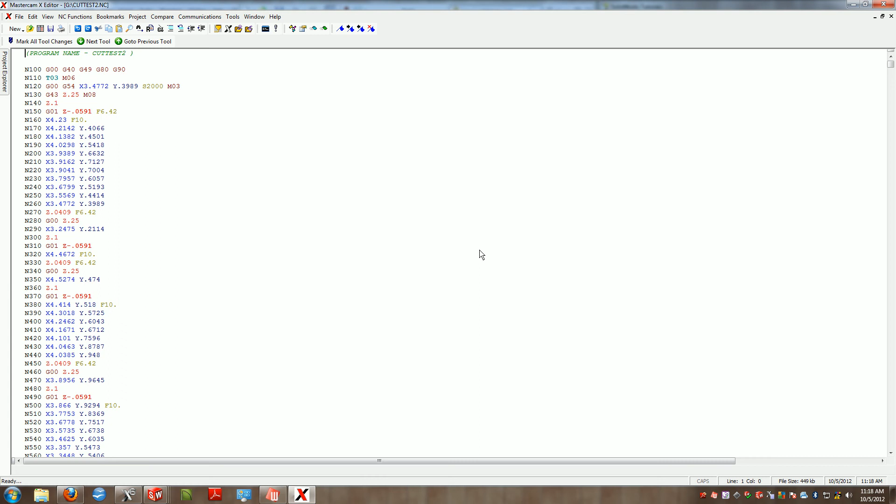Alright folks, today we're going to take a look at the Solidworks Revolve feature, and we have a tutorial available for us to follow along that is directly built into Solidworks. You can also watch this YouTube to keep up with that. If you take a look at the tutorials, which is right here on our resource tab, we can follow along with the Solidworks tutorials

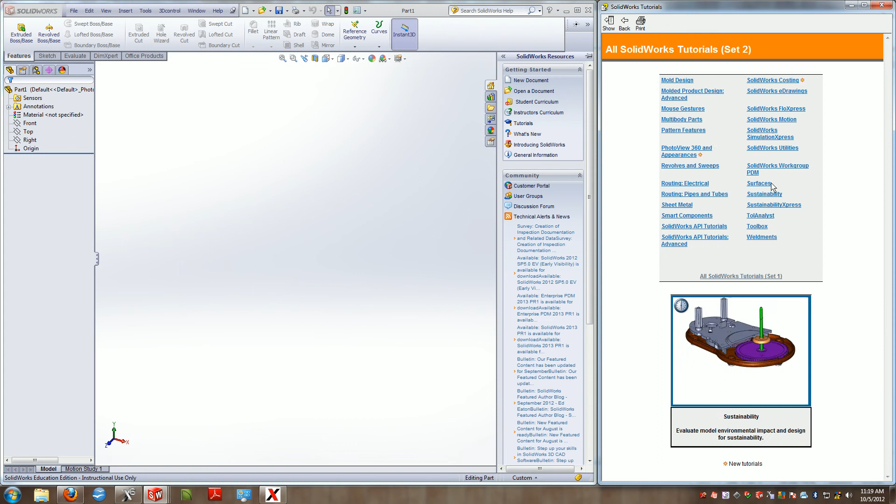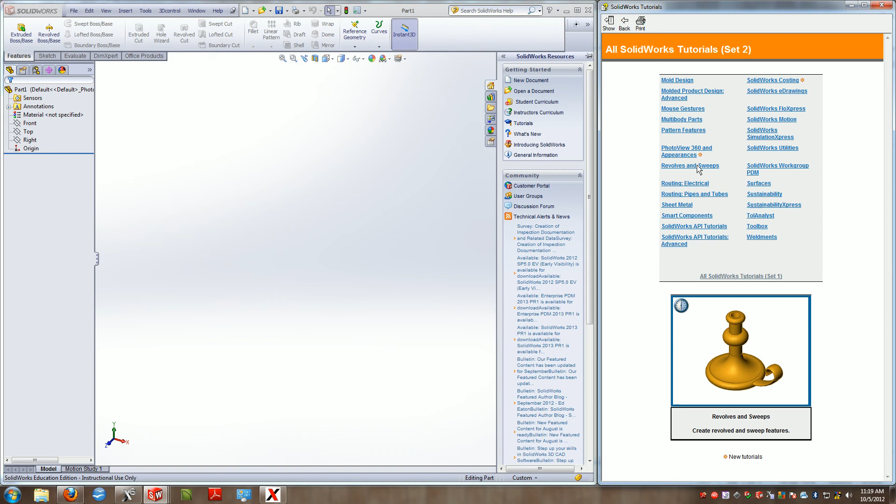set 2, and if you take a look, we have Revolves and Sweeps, which is right here. So we can click on the Revolves and Sweeps, and basically what we're going to be making is this candlestick holder, which is the Revolve feature that we have not yet touched, and then also the Sweep feature to go ahead and create the handle. So I'll hit Revolves and Sweeps, and we can follow along with this tutorial to get this part created.

So I'll hit next. And the first thing you have to know about Revolves, in particular, is that we're drawing half of what we want our final product to be. So if you take a look at this, our bottom section is 90 millimeters. That means that the overall width of this is going to be 180 millimeters when we're done. The height remains the same, but whatever line we're revolving about will be doubled, and you'll see that as I work through the lesson.

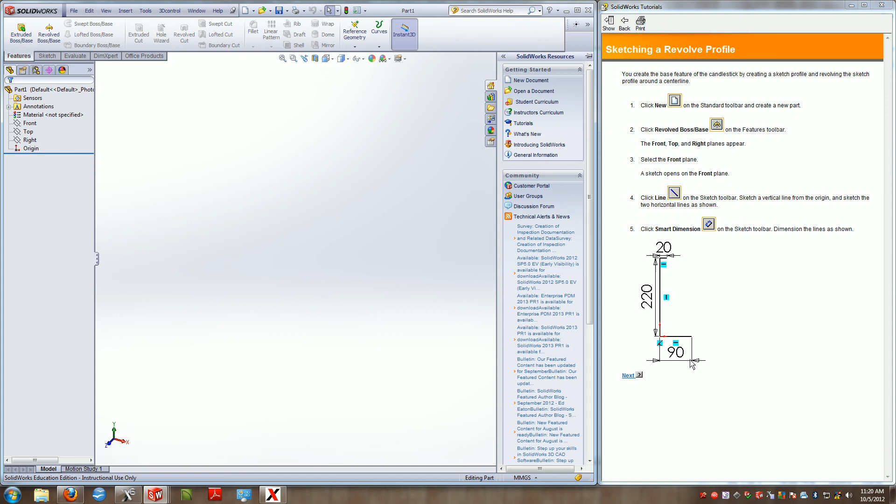Because we are in metric, I'm going to go ahead and change my units to metric. So I'll hit Options, Document Properties, Units, and we'll go to millimeters. Okay. And once again, you can see we're working off our origin. So I'm going to start on the front plane. I'm going to spacebar normal to that front plane, and I'm going to sketch a line that is directly vertical off my origin. That's where I'm going to start.

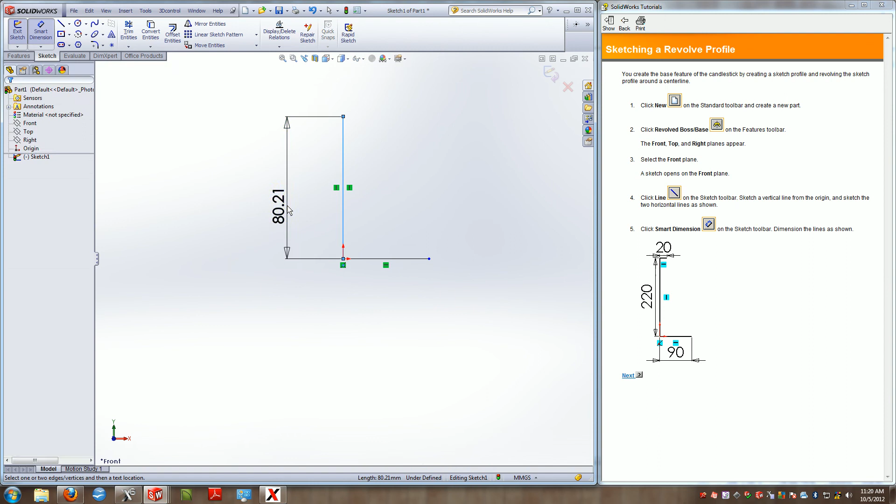If you want, you can also place the horizontal line, and we can smart dimension those to 220 by 90 millimeters. All right, and then if you zoom out, you'll also notice they have a little sketch line coming off at 20 millimeters. So I'll get that drawn and smart dimension that to 20 millimeters. You should note that we have a fully defined sketch and that everything is black, which is a good sign. All right, so we have a fully defined sketch that is black.

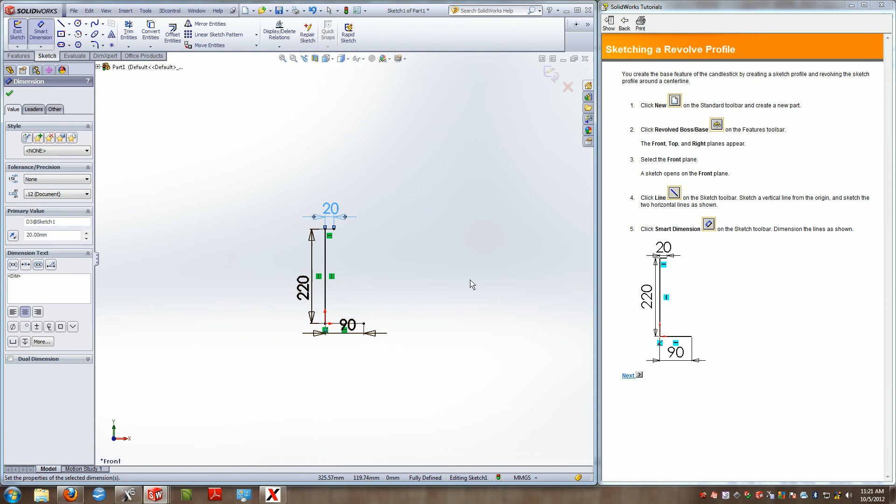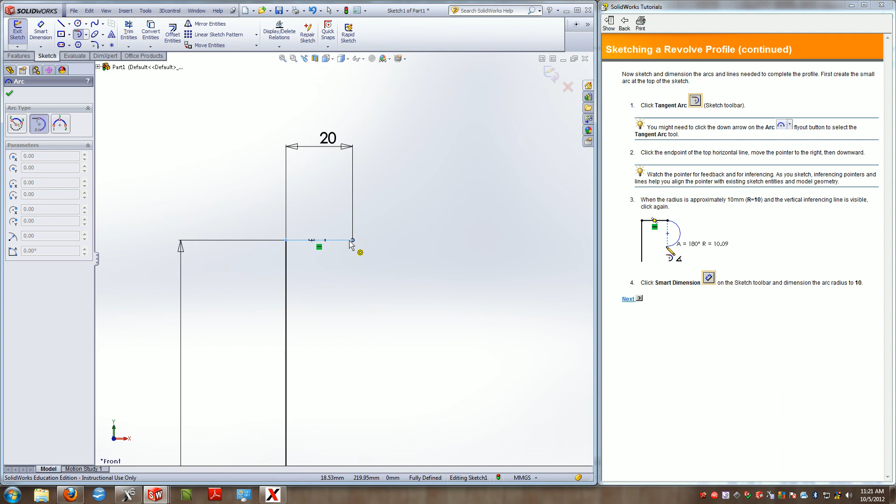So we can go ahead and go to our next step, where we are creating a simple arc. That arc has a center point that is perpendicular to this line. All right, so the center point falls on a perpendicular line. So I'm going to zoom into that section, and I'll create a tangent arc. I will select this portion and this portion. So all I do is select my point, come down, and now we can define the dimensions on that.

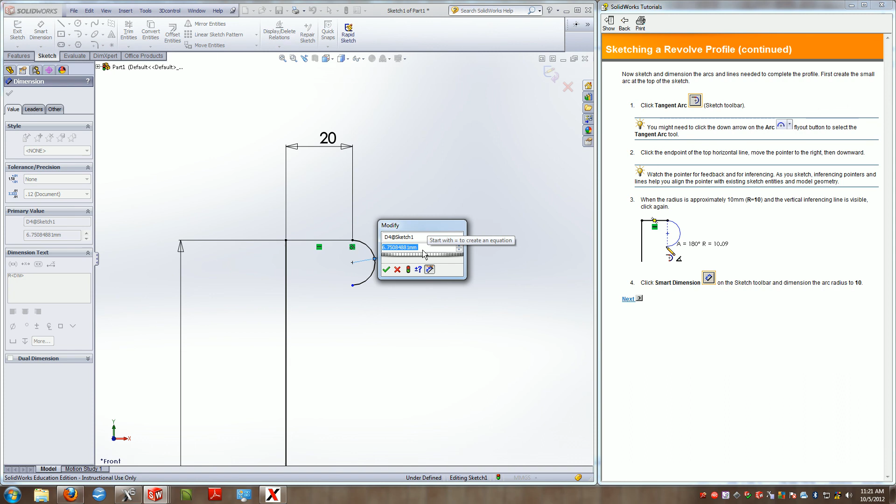So I'll go ahead and smart dimension this arc. All right, it has a radius of 10.09. All right, which gives us that arc. I will hit next. All right. We're going to create a couple more vertical lines coming off this and another arc. You'll learn a new feature in this where we're setting relations to create two lines that are equal, and I'll show you that in a second.

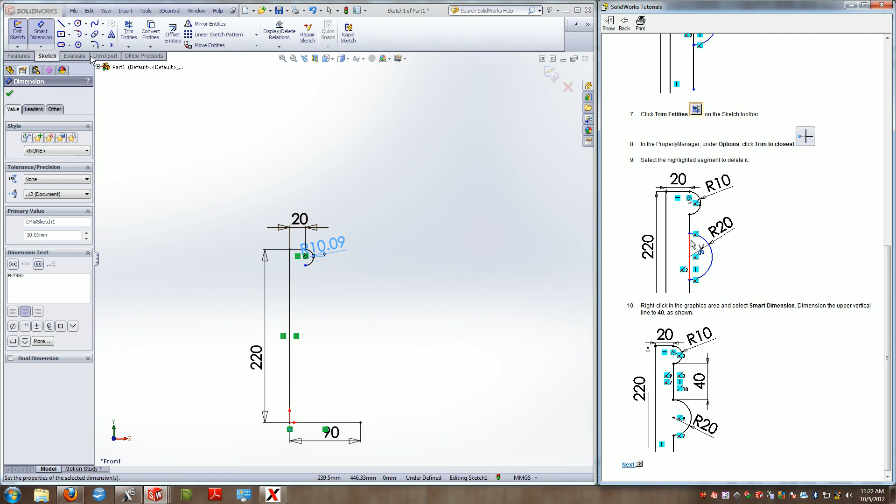So the first thing I'm going to do is create a line that is coming off here. I'll take a little space and I'll create another line, like so. Then I can get an arc placed in between these two. The one thing that we do have to do is set these two equal to each other. So I'm going to select this line. I'm going to hold Shift on my keyboard, select this line. I'm going to set them equal to each other.

Setting them equal to each other, you take a look at this new relation that has been added. It tells me that if I define the dimension on this line to 40 millimeters, it will automatically set this line to 40 millimeters, which is a nice feature. So using these relations can save us some dimensioning down the road. It can also save us some parameters if we know these lines need to be equal to each other.

So I'm going to go ahead and select another arc to get placed in here. Like so. And I can get that dimension to a radius of 20. That should space these lines out appropriately. Okay. In this particular tutorial, they have you draw a solid line, draw the arc, and then trim out the line. Whichever option you decide to go with will work.

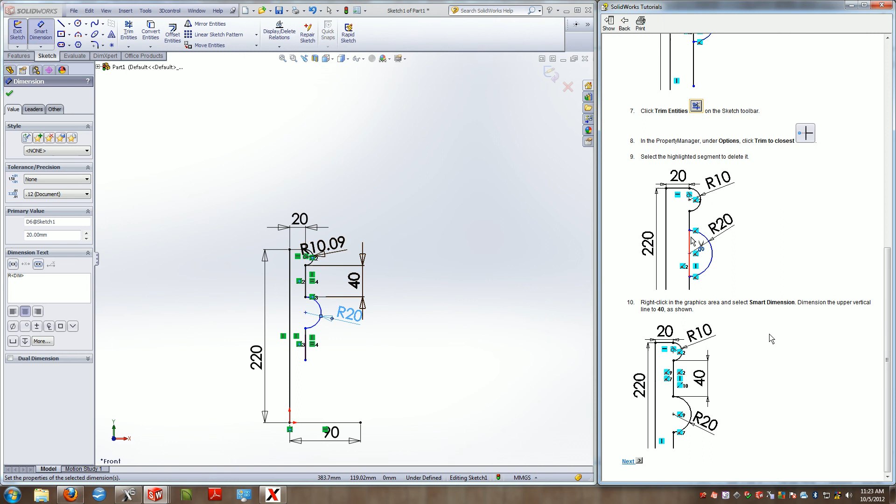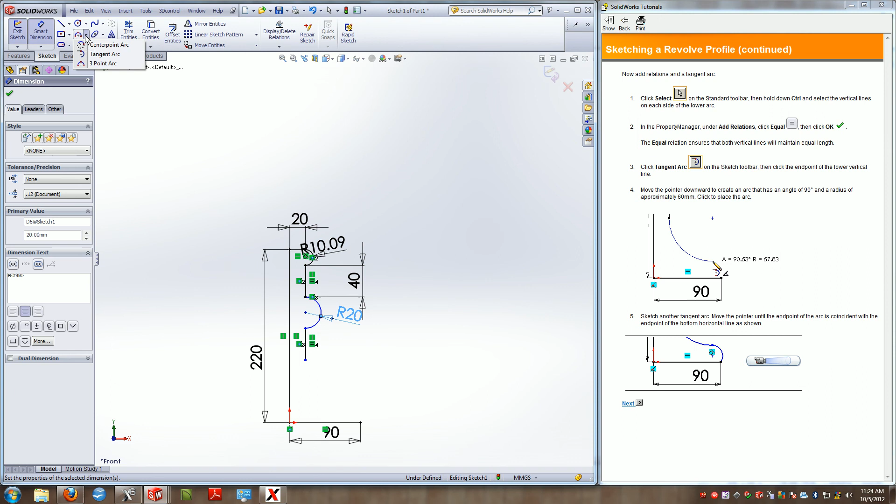So this is the guy in the front, right? All right. What they're having us do here is our relations, which we've already done. So we're going to go ahead and create a tangent arc to swing down for this. So I'll go to create arc, tangent arc, and I'm going to swing this arc out like so, and then I'll place this point down here. Just like so. We can go ahead and get these dimensions now.

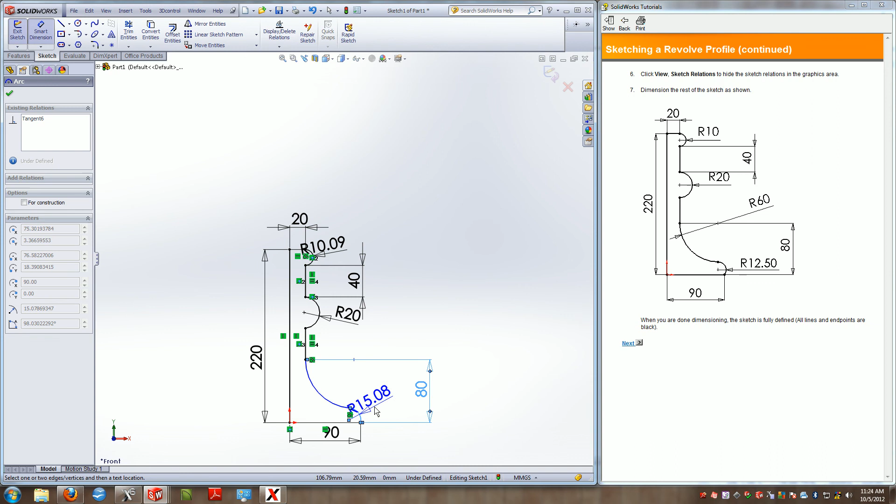This has an overall height of 80 millimeters, so I'll select this point, and pull out my dimension to note that at 80, like so. And this has a dimension of 12.5. Good. And this has a radius of 60. Good. You notice that I have a fully defined sketch now, completely black.

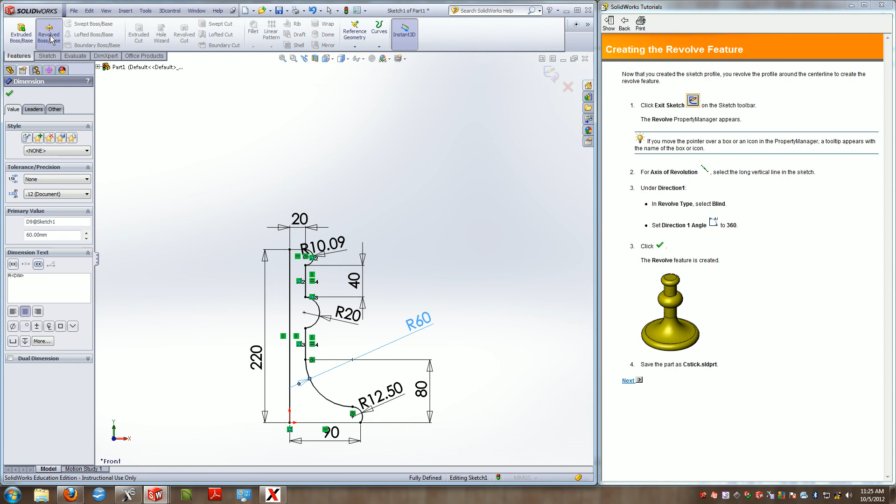The cool thing about revolving is what it does is takes this simple profile that we've just done and spins it about a center axis. So this is my profile that I'm going to spin about this center axis. So I'll come over to Features and select my Revolve Boss/Base. I will click on it, and it automatically looks at this section. You can see it zoom into it.

And in our Property Manager for our Revolve feature, I always like to say work from the top down, so work from this section all the way down to here. First thing it's asking for is the axis of revolution. The axis of revolution is also the center point in which we're going to revolve about. So I'm going to click in this box and tell the computer that this is my axis.

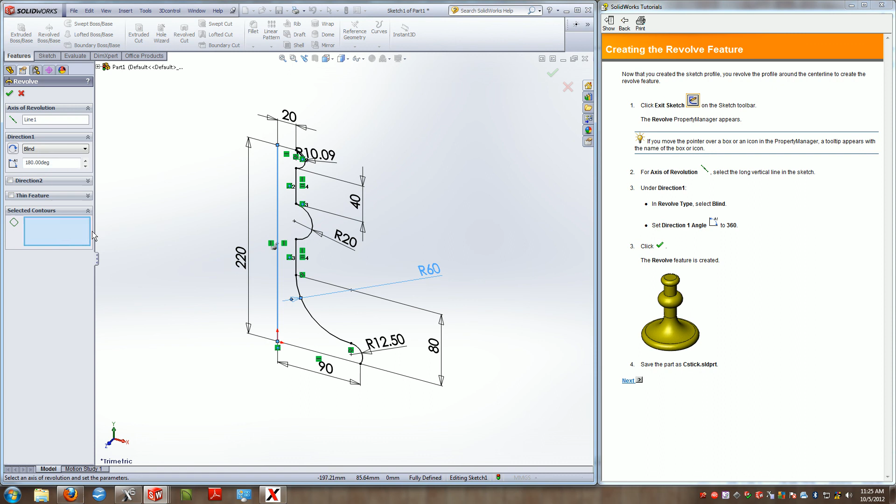All right. We're revolving blindly, and this asks how many degrees we want to revolve. So if we only want to revolve, let's say, half of this, I can tell it 180 degrees. My selected contours are the contours or the area that I want to revolve. So I will select this, and you can see it automatically starts to revolve that into a solid feature for the amount of degrees that I've selected. So if I change my degrees, you can see this revolve feature change as well.

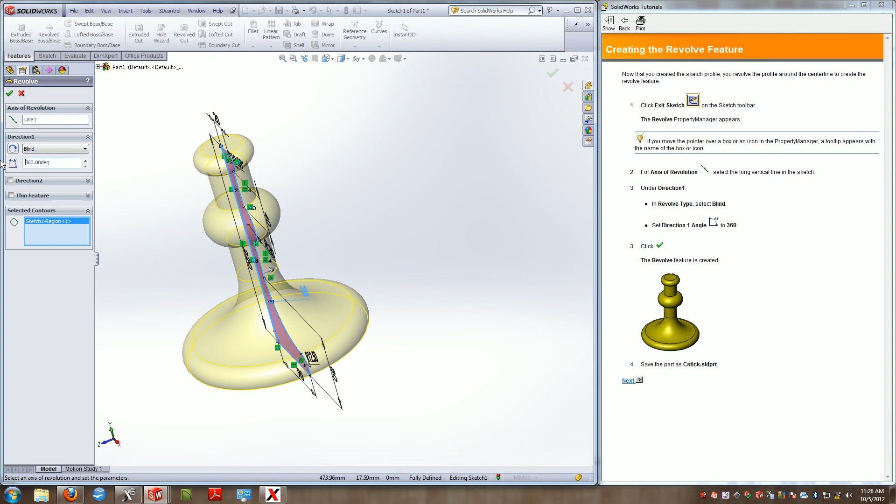If I want this to be completely solid around, I could say 360 degrees. It will automatically finish this up, and what you're left with is now a solid that is spun about or created from that simple sketch that we just did. This can save you a lot of time. If you take a look at this, this is one feature driven off of one sketch.

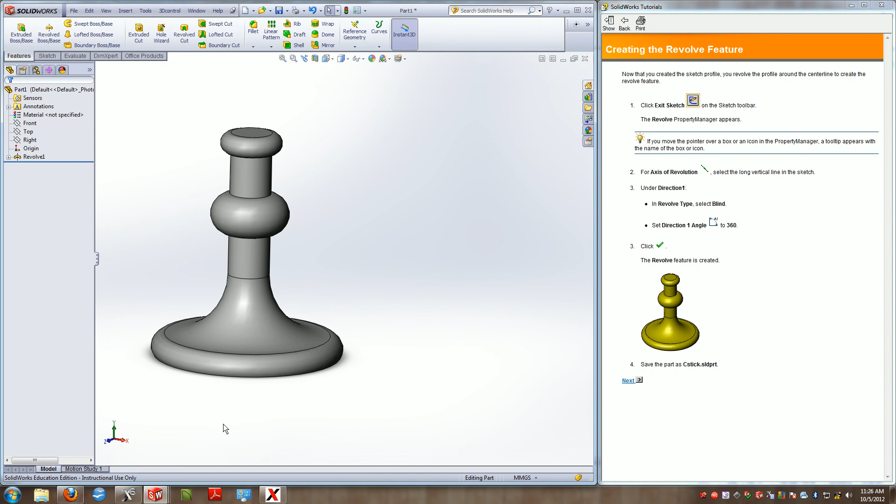You could create this with extrusions. However, you're looking at 1, 2, 3, 4, 5, 6, 7 extrusions, or 6 extrusions with a loft. All right. So it makes much more sense in this particular case, in many of our cylindrical parts, to go ahead and revolve those features to save us some time. In the next tutorial, I'll cover how to create the handle for this.